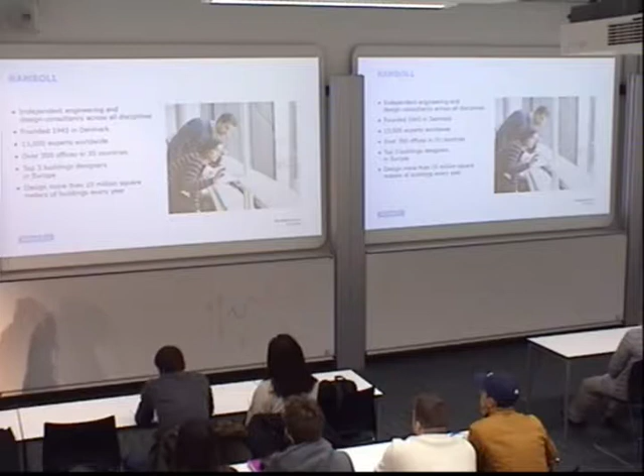So just a little bit about Ramboll for those of you that don't know us. We're about 13,000 employees in total, founded in Denmark in 1945, and at the moment we employ about 1,000 people in the UK. In the structures teams, we're probably about 250 in the UK, and we're a multidisciplinary consultancy, so we do structures, we do services, we do acoustics, we do lots of different things. We design more than 10 million metres squared of buildings every year, so quite a lot. We have offices all around the world and in the UK.

I'm based in the Cambridge office, just up here. We do have an office in Bristol. Our head office is in London. Probably got about 400 people in London, but there's about 25 of us in Cambridge. And I lead the structural engineering team there. And I've been in the Cambridge office for about 10 years now. In that time, I've probably worked on about 45 different cross-laminated timber and timber buildings. So what I'm going to talk about today is just some of my experiences, advantages, issues that we've had when designing with it, and just things to watch out for.

So these are just some of the projects that I've worked on over the last 10 years. We looked at a car park in timber. That didn't get built, unsurprisingly, but we've looked at some schools, done some schools. We've done an education facility for the University of Cambridge. We've done some residential properties. We've done some other teaching blocks, so lots of different things. And historically, timber has come from an educational background, so lots of schools and that kind of stuff. That's where it really started about 10 years ago. And around the last 3 to 4 years, it's moved quite heavily into the residential sector because people are seeing advantages of building with it in the residential sector.

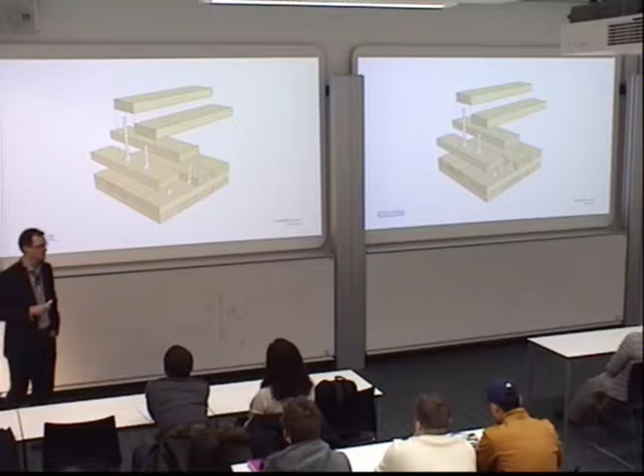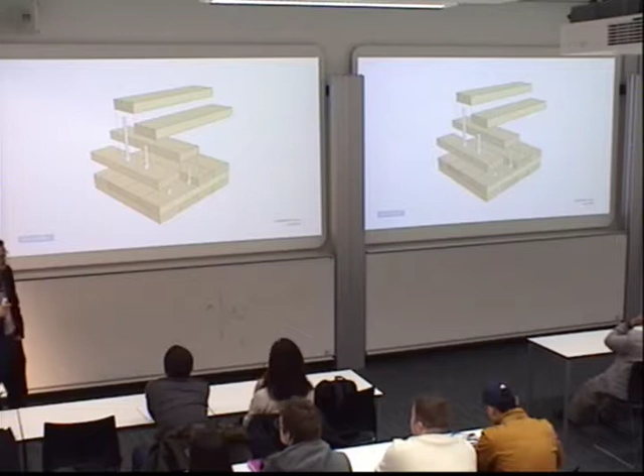So who knows what cross-laminated timber is? Who's ever seen a piece of cross-laminated timber? Anyone? Few half hands going up. Okay, that's fine. I'll explain a bit more about it. It's just interesting to understand what it is. And who's thought about designing with it before? Or who is doing their projects with it or thinking about it? A few people? No, that's good. So I would encourage you all to be looking at it because I think it's got a lot of advantages when used in the right situation. I think there are some situations where you can force it in there and it doesn't really work, but most of the time it can work.

So cross-laminated timber is layers of softwood laid on top of each other orthogonally with glue in between and put in a big press and pressed together. So they make big panels. They come in panels around 13.5 metres long by about 2.95 metres wide. They can manufacture up to about 18 metres long, but to transport to the UK, you can only have about 13.5 metres long. 2.95 is the maximum width transported to the UK. You can have up to about 3.5 metres, but the more standard width is about 2.4 metres.

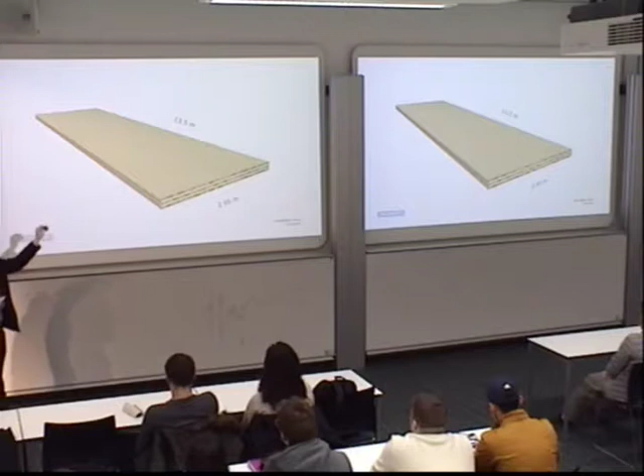And this is quite important in terms of the sizes, because the cross-lamination means that within a panel itself, it's two-way spanning, but when you start to put the panels together, you're really only one-way spanning, because you can't have a moment connection between the panels. Well, you can, but it's very hard and very expensive, and you shouldn't really do it, to be honest, unless you really, really have to. I think we've only ever done it once on all those projects. So it's something that really we should try and avoid.

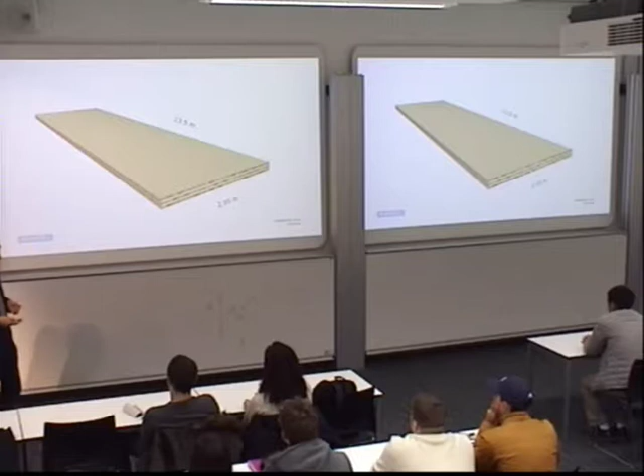So it comes in thicknesses between about 50 millimetres and 300 millimetres thick. So interesting for you who are doing your scheming, design and your projects. Walls will normally be between about 100 mil thick up to about 140 mil thick, and floors will be anything between about 140 to about 200, 220 thick, something like that. If you're starting to look at your floors and they're coming out about 300 thick, you've got the wrong solution, in my opinion.

This should only be used in a very occasional situation in terms of the 300mm thick for a floor, because whilst timber is good, we need to think about how much we're actually using of the timber, and we're not using this efficiently. We're only really using the bit at the top and the bit at the bottom, and the rest in the middle is just a spacer. So it's not an efficient use of the timber.

So where does this timber come from? Well, it comes mainly from Europe. We don't have any manufacturers in the UK who produce the CLT. About 90% of it comes from Europe, so from Austria and Germany, and the rest, well, we don't really get it from here, but it supplies the market in the US and down in Australasia.

So three main manufacturers, suppliers to the UK, are KLH, Binderholz and Stora Enso. They're the three main ones who supply CLT to the UK, and they do it through the subcontractors they have. So KLH do it through KLH UK, Binderholz do it through B&K Structures, and Stora Enso do it through a company called Eurban or G-Frame. So there's different ways to get it to the UK.

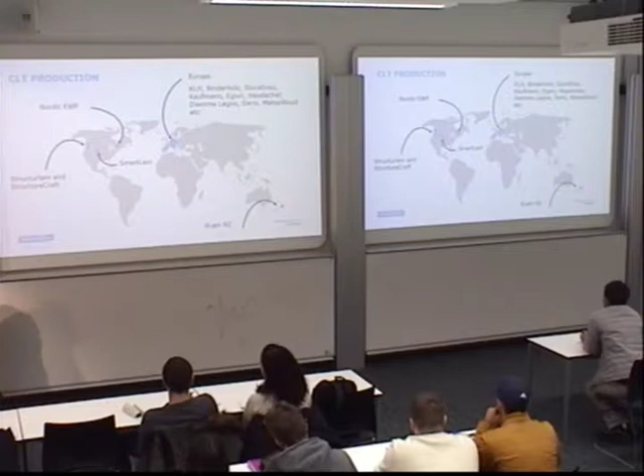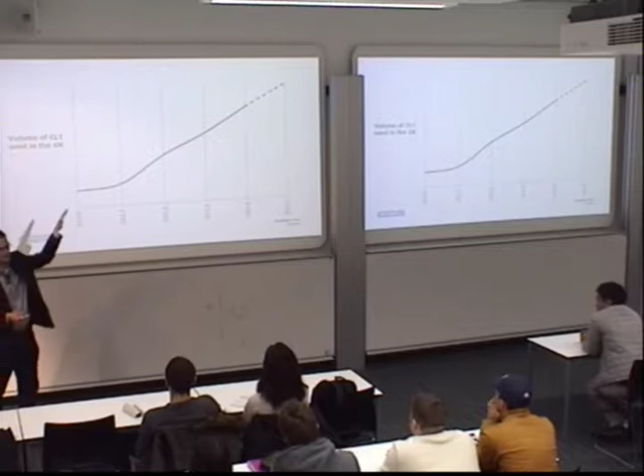So what you might be interested in, when you go into consulting engineering or whatever it is, if you're looking at the structural side, is applying it within your work. Well, one of the things that I've certainly seen, since 2010, is the volume of CLT used in the UK has gone up dramatically. I haven't quite got the numbers for 2015 yet, but I've seen some indications, and it's carrying on for 2016 as well on that trend. So lots of people are using it, and the volume of CLT used in the UK is going up.

Equally, people are getting more interested in it. They've mentioned it in the press. I'm sure if you have been looking at it, you'll have Googled it, and there's loads and loads of articles about it in the press. And that's been increasing as well over the last few years in terms of use, in terms of people being interested in it and wanting to learn more about it, which I think is great. It means that we can start to use more of it and start to use it in the right kind of ways.

So over the last sort of 10 years in the UK, about 1 million metres squared of internal area of buildings has been completed, which is massive. I mean, a typical secondary school might be about 10,000 metres squared. So lots and lots of buildings have been completed in it. So if people try and say it's new, it hasn't been used before, it has been used quite a lot in the UK. So it's not as new as quite a lot of people think.

So the question is, when you've been looking at it or thinking about it, is there anything that's stopping you from using it? I mean, it may be that you haven't really looked at it, but has anyone got any thoughts about why people wouldn't use it? Anything?

No? Okay, well, I'll carry on.

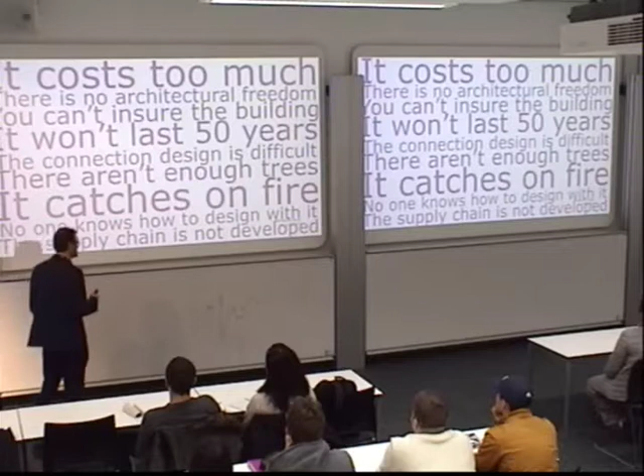These are some of the reasons why we found that people don't use it, why architects, clients, developers don't like to use it. So cost, that's a big one. Then there's things like there's not enough trees, it catches on fire, there's not enough supply chain, people don't know how to design with it. Well, hopefully that will change if more people like Wen-Shao teach people how to design with timber.

I mean, one of my bugbears is that we don't really teach timber in engineering degrees. There's a lot of concrete, there's a lot of steel, but not enough timber. So hopefully, coming here, you'll actually get some timber knowledge, whereas most universities don't. So I think hopefully we can get around that one. But there's lots of different things there that stop people from using it.

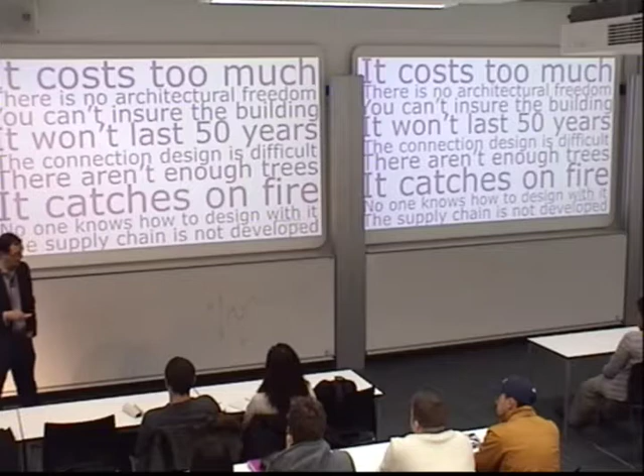So I think what I'll go on to now is just some of the advantages that I've seen and Ramboll have seen as to why you should consider it on projects. So this one here, CLT is very fast to erect. It's very quick to put up. So typically a CLT building might go up about 15% quicker than an equivalent steel or concrete frame.

So that 15% means that you can be on site for 15% less time, and you don't have to pay your site staff and everything else, and you don't have the contractors' overheads and prelims, so all their welfare and all their site cabins and setup. You don't have to pay for that for those 15% of the time. So it means you're starting to bring the cost down because of that.

Also, we did a 10,000 metre squared school. The CLT alone went up in 16 weeks. To do equivalent steel or concrete frame would have taken about 32 weeks, so twice as long to do the frame. Obviously, once you've taken into account the rest of the programme, it comes back down to the 15% I mentioned earlier. But it's about 50% quicker just for the frame erection, which can be quite important.

So when I talked about costs earlier, the costs are quite key to this. So a concrete frame might be about £200 a square metre to build. A CLT frame will be around £250 a square metre. So it's already 25% more expensive, which is going to be a struggle for any client to pay that extra money. Well, you've then got to look at, that's just a pure frame cost. When you start thinking about the saving on the programme, then you can really make that saving and really bring it down.

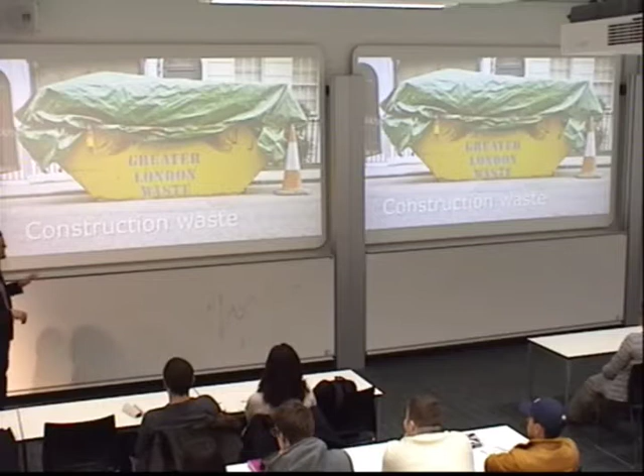Equally, there were only 2 cranes and 8 people on site during the whole superstructure erection. So that meant that health and safety wise, there were less people on site, less risk of accidents. So from a designer's perspective, that's good because we're already trying to reduce the amount of people and the risk of accidents on site.

Air tightness: the CLT, because it's cross-laminated and glued together, the air tightness of the panel itself is very good. It doesn't really let air pass through it. When you join them together as well, you half-lap them, you screw them together, and you create a very good air tightness seal there. So what you actually find is that CLT buildings are actually very airtight.

So instead of having an air leakage rate of, well, the building regs say we need to be down at 5 metres cubed per metre squared per hour, typically a CLT building might be down at 2.5, 3. So that air leakage rate means that you don't need to put as much heat into the building, so your M&E kit can be smaller, and therefore you make savings on that. So there's lots of added advantages to it that aren't immediately obvious from just looking at the CLT.

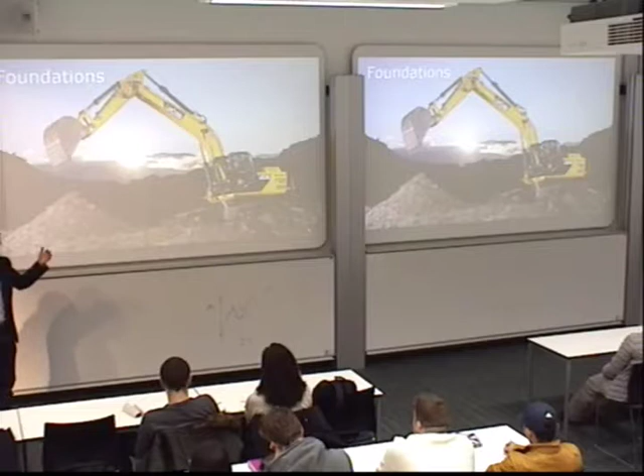The CLT, if you look at it pure mass by mass against concrete, CLT might be 500 kilograms per metre cubed. Concrete will be 2,500 kilograms per metre cubed. So there's a big difference in weight. When you look at it in terms of how much structure you need to put in, how much building weight you need to have in there, and all the people, a CLT building will be about 30% lighter than an equivalent steel or concrete frame. That's when you take into account all the floor finishes, all the desks, all the people and everything in a building. So that's quite a big saving.

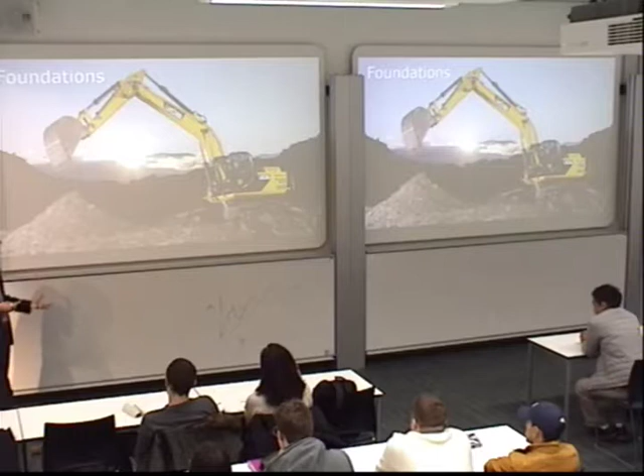So that means that if you've got underground infrastructure such as tunnels, sewers, or weight restrictions on the building, that can make a big difference. That means you can go taller, you can do bigger, you can do different things. Equally, if you don't have a restriction and you're just going into the ground, you might even be able to make a 5-10% saving in the ground in terms of cost, in terms of program. Again, that adds to the benefit of building in CLT.

And because your CLT forms your walls, your external walls, you can actually avoid a lot of secondary steelwork. So you're just fixing your cladding straight to your timber. So you don't need to think about putting in extra bits of steelwork just to support the cladding.

So a very little bit on the engineering, because I'm not going to teach you about how to design with CLT. Leave that to Wen-Shao. I'm just going to talk a little bit about the very basic principles, which I come back to day after day in terms of engineering. So it's really important with something like timber to understand what the material properties are, and going back to first principles. So for me, thinking about timber as a bunch of straws is a very good way to think about it, because you can squash them quite readily in one direction, across the grain. But if you try and push on the end of a bunch of straws, it's actually very hard to squash them, and that's really important.

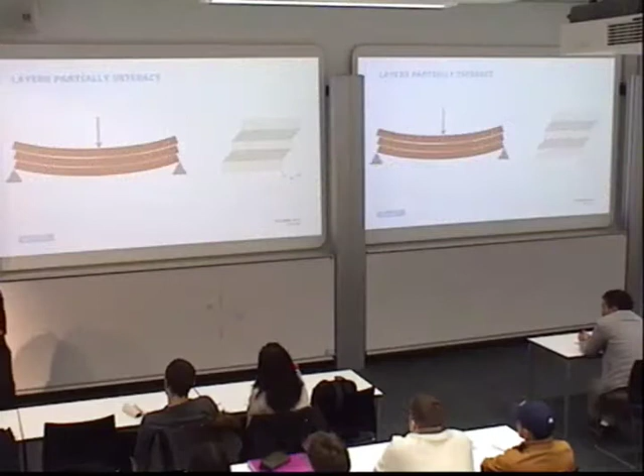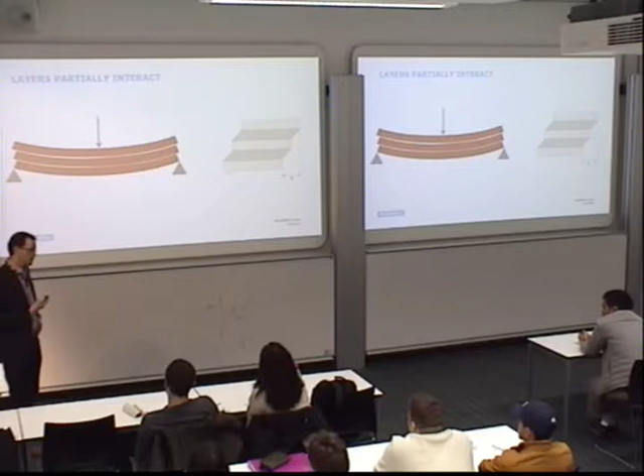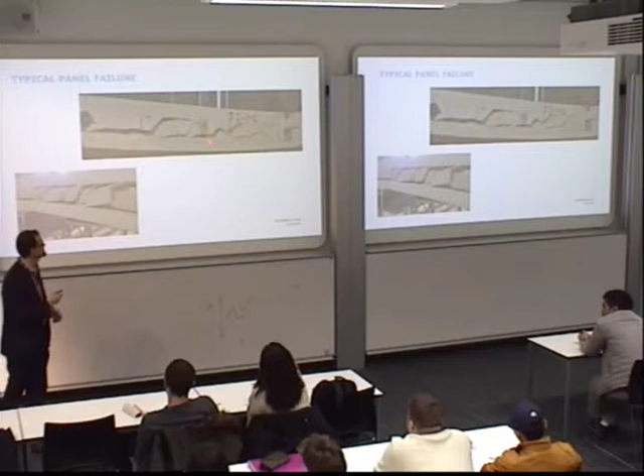So a little bit about the engineering. By cross-laminating it, we're trying to stop these layers from sliding over each other. But what you do get is you've got all your straws in there, so what you end up with is rolling shear. All those straws roll over each other. And this is just one of the failure mechanisms we're trying to avoid, a rolling shear failure, which is actually one of the most common ones in CLT. So you've got your top and your bottom chord, which are doing the work, as it were, and this is the spacer layer, but then it's also rolling over each other, and you get a rolling shear failure.

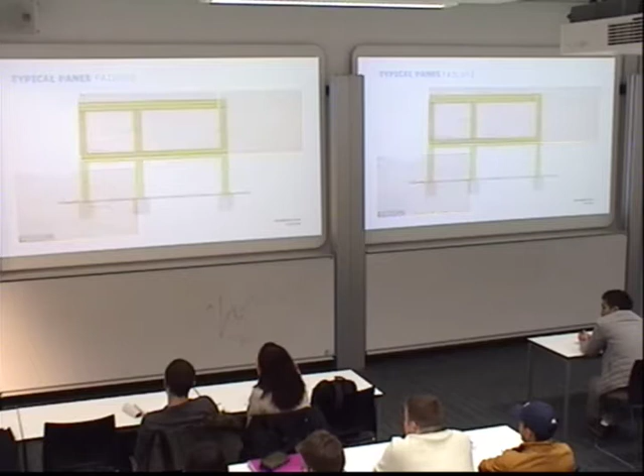This might even be one of your pictures, to be honest. I'm not sure.

So obviously what we're trying to do is take all our gravity loads and put them down through the floors, to the columns and down into the foundations. Very, very simple stuff. When we start to go tall as well, we need to start thinking about how we can make the building stiff enough so that it doesn't move too much in the wind.

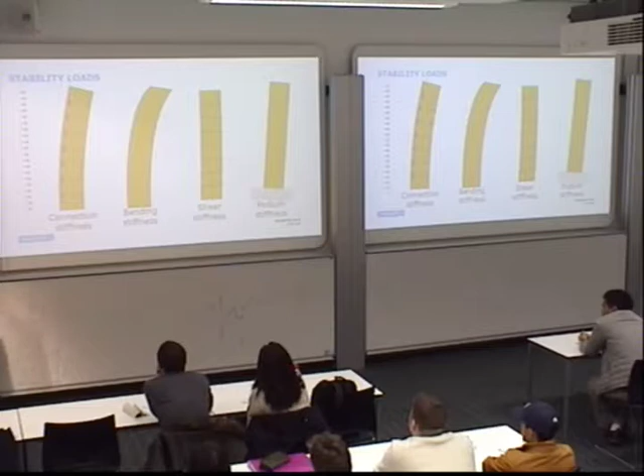They hadn't got the fire compartmentation in there at the time, and it's one of the risks of building with timber, especially during construction, is any kind of electrical fault or anything that causes a fire. And if it's not protected properly, or there's not the right kind of fire alarms, you can have this kind of thing happen. One of the positives that came out of this: it burnt down on a weekend, so no one was in there, which was definitely a positive.

But it was designed for a 2-hour fire rating. It stood up for 6 hours before it fell down. So immediately, you could say we're possibly over-designing then, because this was one of our projects, because it lasted for 6 hours and it was only meant to last for 2. But it shows that the codes are inherently conservative.

With what we do, when you're a consulting engineer, there's a tendency to design things to 80% capacity or something. To be honest, you could design everything to 100% capacity and it will still be fine. Probably design it to about 120 and it wouldn't be a problem at all. So it's just interesting to understand the fire nature of it.

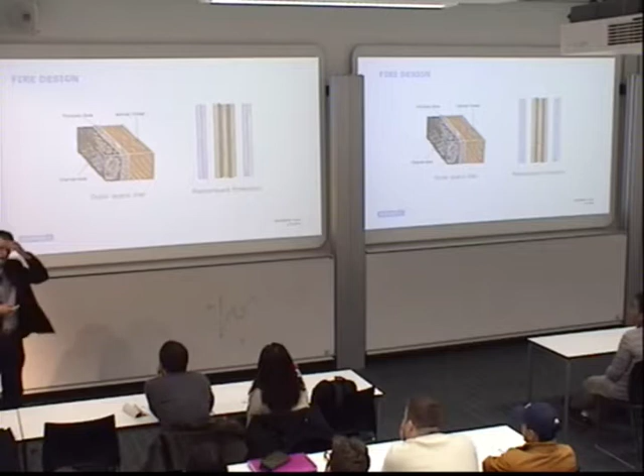There are different ways of doing the fire design. One of them is to leave it exposed and have a charring layer. Timber chars at about 0.7 millimeters a minute, typically. So after a certain amount of fire, we know we've got some timber left there that can take the load. As long as that timber is man enough to take the load, it's fine, it can work. Or we can cover it with some plasterboard. That gives us a bit of fire protection, and then the rest of it is taken in the timber and charring again.

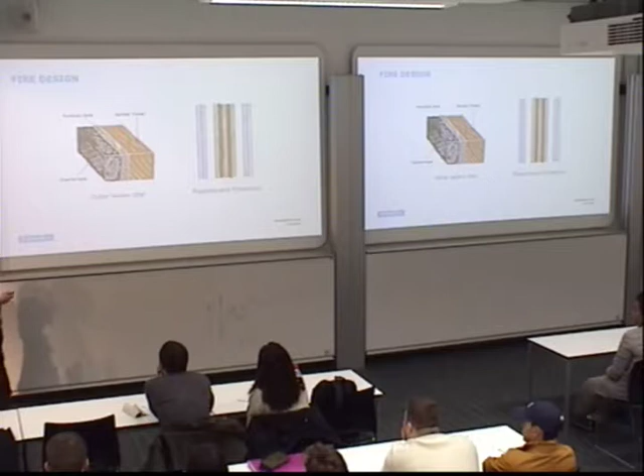And after an hour, we took the coals off, and we just wanted to see what happened. Did it carry on burning? Did it carry on charring? Did it smoulder? What happened? Well, it carried on smouldering for about an hour, and then it kind of just stopped. And that was it. It didn't suddenly keep on burning, didn't suddenly disintegrate. You'd probably only use it about 5 or 6 times, and then it would probably disintegrate.

But for us, as engineers, it was quite nice as a very non-technical experiment on how timber performs under fire. And it reassured us that what we were looking at in terms of the code and how we were designing with it was kind of right. We kind of understood it a bit better because of this.

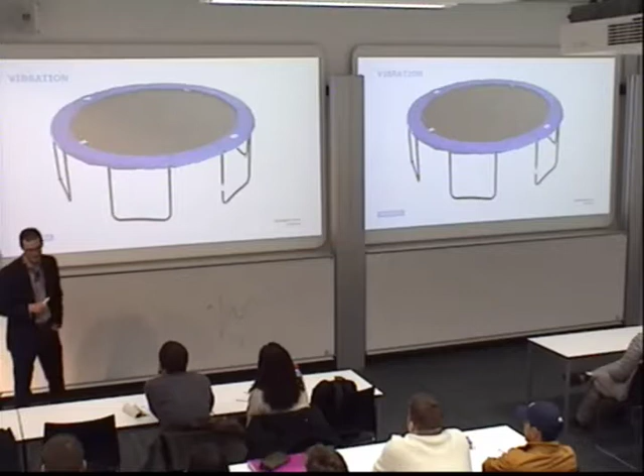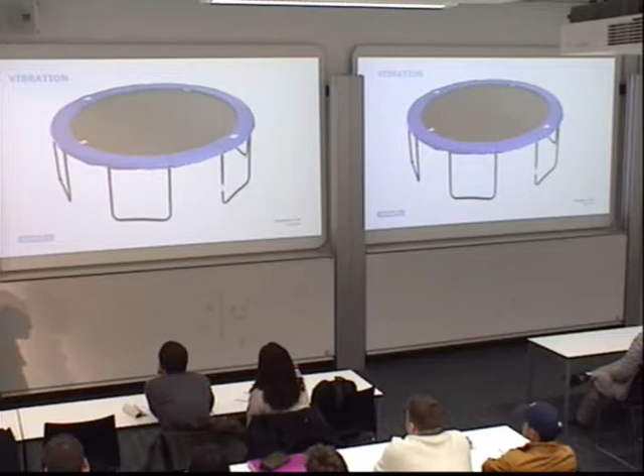Vibration, I know I've been talking to Wen-Shao about this earlier. When the codes at the moment say design it for 8 Hertz natural frequency for a residential floor, that's not entirely the best way to look at it, and then there's no real guidance for schools, so we go down to about 6 Hertz, but it's a rule of thumb that we worked with over a number of years. But vibration is quite important. It is lighter weight than concrete and steel, therefore you do need to think about it more in terms of the vibration criteria.

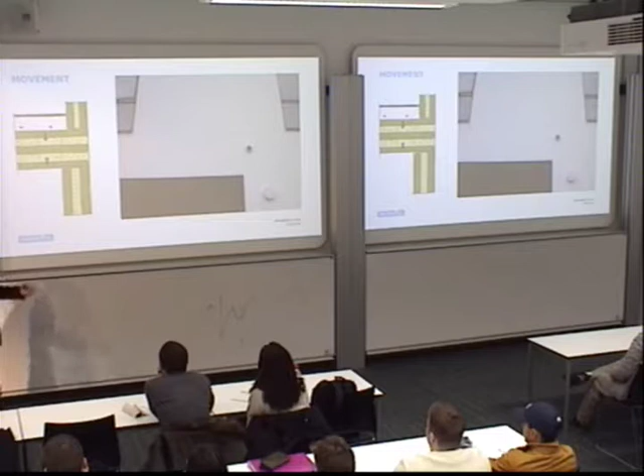You're also going to get drying shrinkage as the timber dries out. And what happened on this project is, this is a rendered facade, and basically the floor is squashed down and popped the render out. So it's broken the render and it's popped out, and that's the line you can see along here. So movement is really important to understand in timber. You've got to think about it early and think about how you mitigate it.

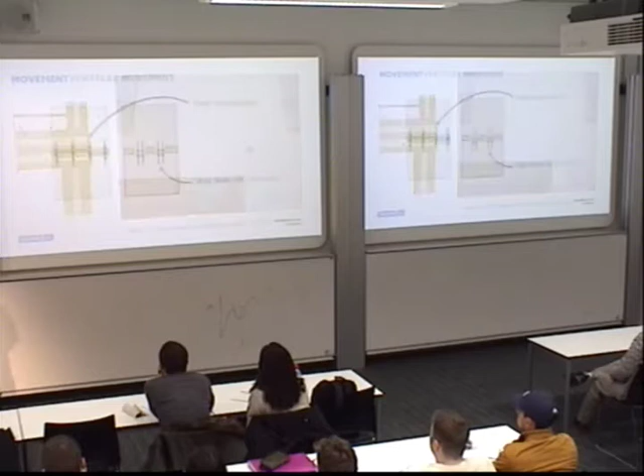On this one, the simple thing to do would be put a movement joint in the render. It's very simple to do, but it wasn't done, and therefore it cost a load of money for the contractor to come back in and fix it. So movement is very important. You can try and avoid this by doing things like this, where you take the end grain straight down and you put it onto the end grain of the wall below.

So this is the floor coming through here, here, and here. So you can do that, and you try and put the end grain to the end grain, so you're not squashing any straws. You're only going on the end of the straws. This creates problems in as much as then you have a lot of wastage of your timber, because you're cutting out this section of the wall there, there, and there, and you're cutting out this section of the floor here and here.

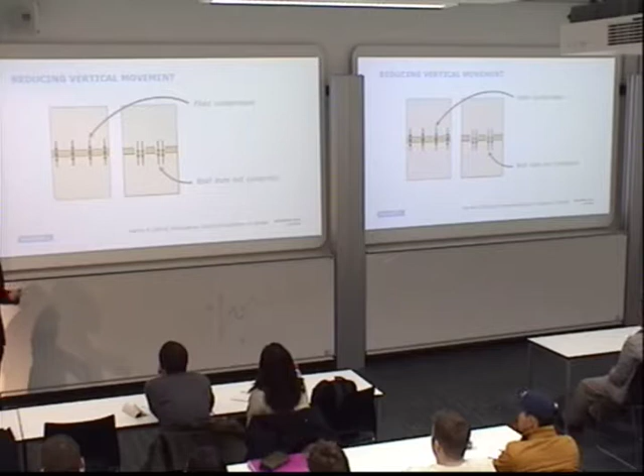And when people build with timber, you pay a lot for the timber itself, for the volume of timber, and you pay for it as a big 18 meter long by 2.95 meter wide panel, and anything they cut out from it, you still pay for that. So you want to try and avoid these kind of things.

So we've been working on a 10-story building, and what we've actually done on this one, we've cut out little sections of the floor, and we put a grout pocket in there. So we put a pocket of high strength grout to try and stop our crushing and stop the movement of the timber frame. Because we worked out that if we didn't do anything, we'd end up with 60 odd mil of movement at the top of the building over the lifetime of the building, because it would settle down, it would shrink down, and it would crush under the weight of it.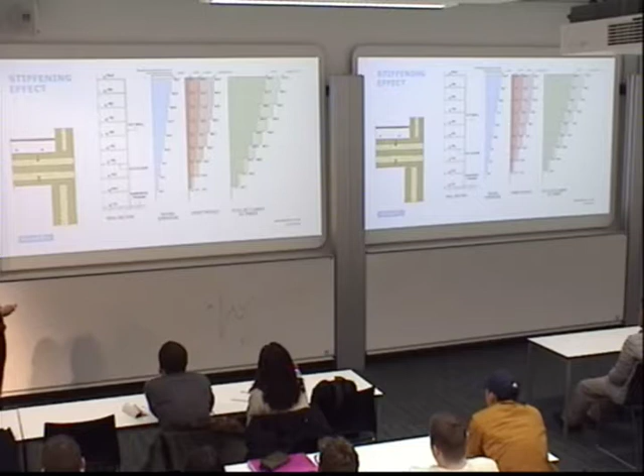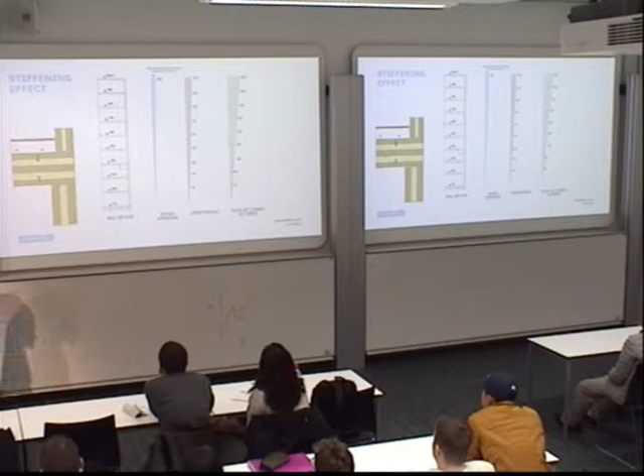So obviously that's not good for a number of reasons, for your lifts, for your thresholds, for your finishes, for your cladding and everything else. So we knew that wasn't going to be acceptable to the client, so we looked at various options of stiffening the floor. We came up with, in conjunction with a subcontractor, the grout pocket, and we got the deflections down to about 10 mil, which is not too dissimilar to a concrete frame or steel frame, which will have some axial shortening in it anyway. So the client was very happy with that. He was used to concrete frame, so he was pretty happy with that.

So a little bit about scheming, which may well be helpful to you. If you can, try and keep that and avoid this. This means you'll have transfers, you'll have a thicker floor slab, it'll cost more. You can try and line up your load-bearing elements, you'll have a much more efficient structure, and therefore you're much more likely to make the CLT work, or to be honest, have a more efficient structure, whatever your structural form. It's a more complicated design as well. If you're short on time, which we often are as engineers, trying to make the design as simple as possible is better for us, while still having the architectural freedom to do something different.

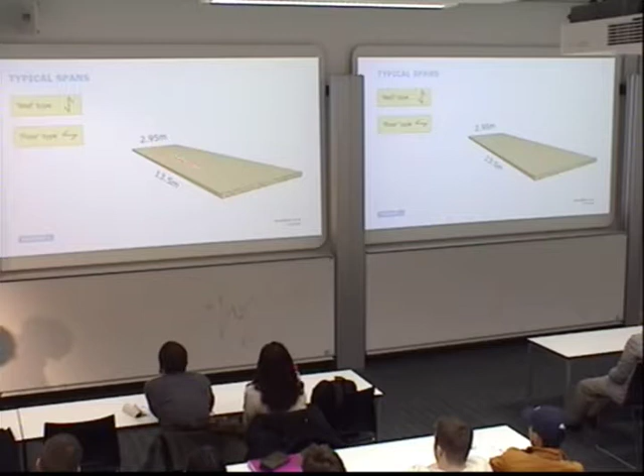So you've got different types of panels. You've got ones where the outer grain is going vertically, so through here, or you've got the floor ones where it's going horizontally. So this is the floor here. Whereas if the outer grain, if those lines were going in this direction here, that's what we call a wall panel. So it's just different ways of the outer grain and the orientation depending on what you want to do with it.

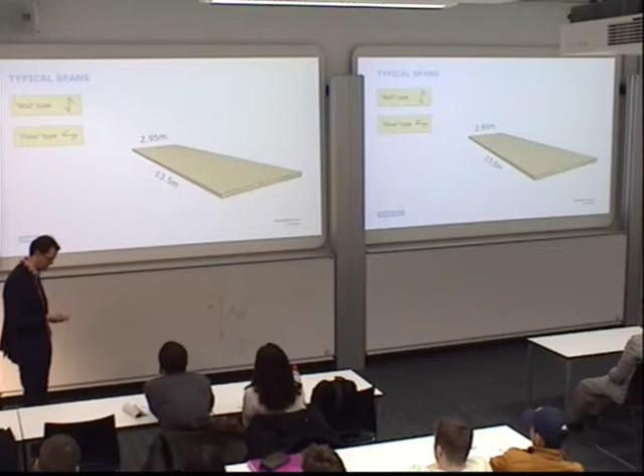So typically offices can span up to about 7 meters, residential up to about 5 meters. So they're just rules of thumb, but they're fairly standard. You can go more, you just might end up with a thicker floor and something that's not necessarily as economical.

Because it's a lightweight material, if you can try and keep your finishes lightweight as well, that helps because it just means it's a lighter building and you make efficiencies with it. So if you can have things like timber boards, stud partitions, timber boards for your floor, cladding, something lightweight, zinc, panelization, panels, that kind of thing, and try and avoid bricks, thick screed, block partitions, that kind of thing. Just makes it easier.

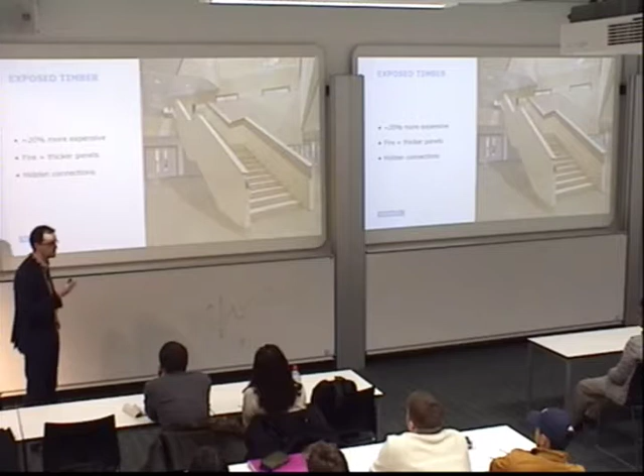You can have exposed timber and it can look very nice. This is a staircase that is actually made out of one panel, and even the balustrade is recessed into it. So it does cost more to have it exposed because they have to do more finishes to it to make it a nice finish so you can walk past it and you can touch it.

Also, just coming back to the fire, if you have it exposed, you have to put more timber in there because you have to account for the fire case. So you have to put more timber to make it thicker so that when it burns away, you've still got enough timber left. And connections can be a bit more tricky because they have to be hidden away. You don't want to see lots of bolts. Well, you might want to, but typically you don't want to see lots of bolts, screws, angle brackets, that kind of thing.

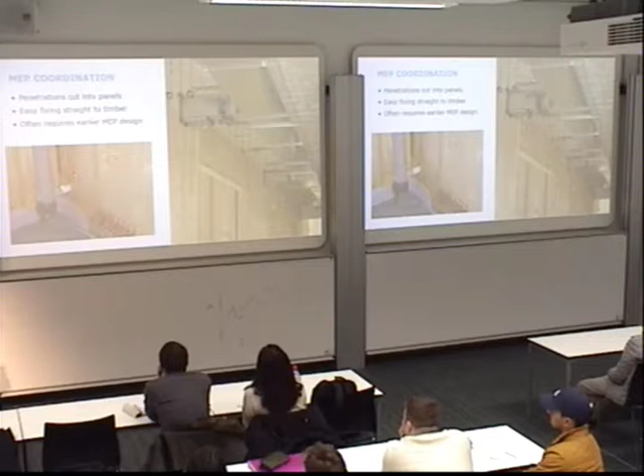And one of the things to try and do is try and get your coordination with your mechanical and electrical services done early. Try and do that so you can pre-cut all your holes in the factory for all the services. You can even prefabricate a lot of your services and put those in as well. So there's a lot of coordination things that can be done nice and early and try and avoid things like this, which is an afterthought of a hole in the timber.

So just a little bit about the details. You know, as consulting engineers, most of the time, most other companies will design maybe a scheme design in timber and then it will go to a subcontractor. About 10 years ago when we started looking at this, we took the decision that we're consulting engineers, we should be able to design in steel, in concrete and in timber. There's no reason why we shouldn't. You know, it's a material, we just have to learn how to do it. So we decided that we would do the design for that.

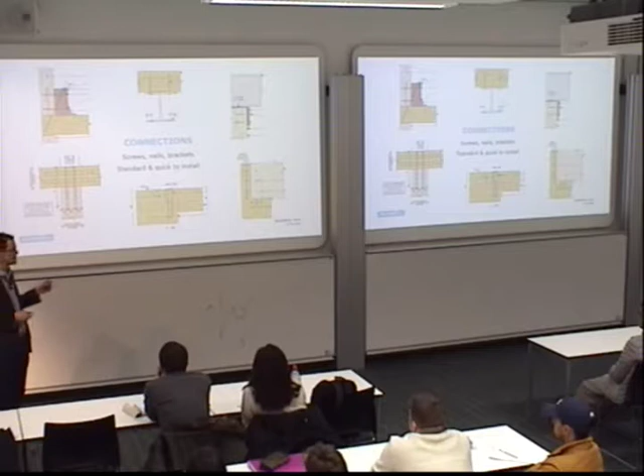What you'll find is when you do a lot of timber design, connections do govern quite a lot of the member sizes. Certainly with beams and things, you can design a nice glulam beam, but you can't get the forces out at the end of it, and you have to start making the glulam bigger. So at first we didn't do the connection design, and then we went, hold on a minute, we need to be able to do the connection design as well. So now we do the connection design and the timber design, which most consulting engineers won't do. But I think for me, I didn't really see the point in being a consulting engineer if I couldn't design with most materials.

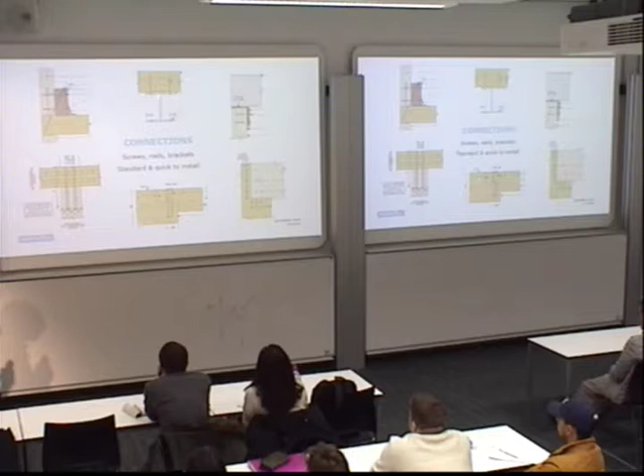So these are just different connections. This is a parapet here with a floor here and a block. Sometimes we put steel in there. You can put steel together with timber very well. You'll see here these interesting little holes, so you can actually put the drill through and screw that in. Because you've got to think about buildability. How are they going to screw that in if you can't get your drill bit in there to screw it? So you've got to think about these kind of things. So it's quite an interesting way of thinking and a much more practical way of thinking than potentially just designing a steel beam or a concrete beam.

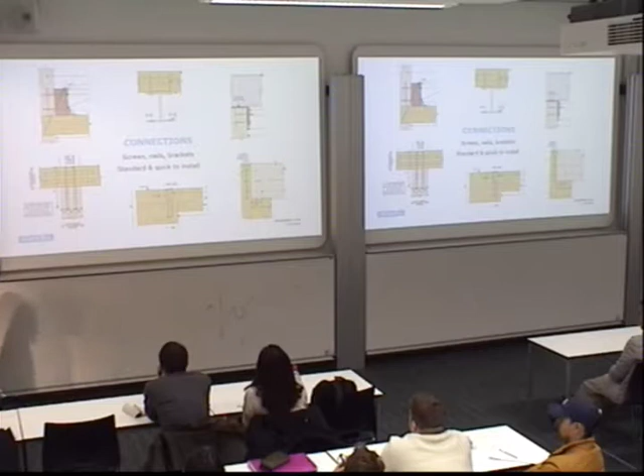When you start to go tall, you start to have to think about how you're going to transfer those forces between the panels. So if we think about when you start to try and push the building over, you're going to have overturning forces. So we developed this kind of detail, which is a bolt through the floor. So when our building starts to topple over, you can imagine you get uplift on one side and a crushing force on the other. And the wind can obviously blow from two directions, so you have to have uplift on this side and crushing on the other.

And these ones in the middle, they take the shear. So it's basically a third in uplift, a third in shear, and a third in downforce. So that's just typically how we look at it in terms of the engineering design.

And one of the things that really interested me and why I got into timber design in the first place is, what I've been discussing, we're not even sure that that's completely right. We think it's right, but we don't really know because there hasn't been enough research done into timber and how it reacts. So we're pretty confident, but I'm sure if we did this again, we did this design 2 years ago, even now we'd probably do it slightly differently.

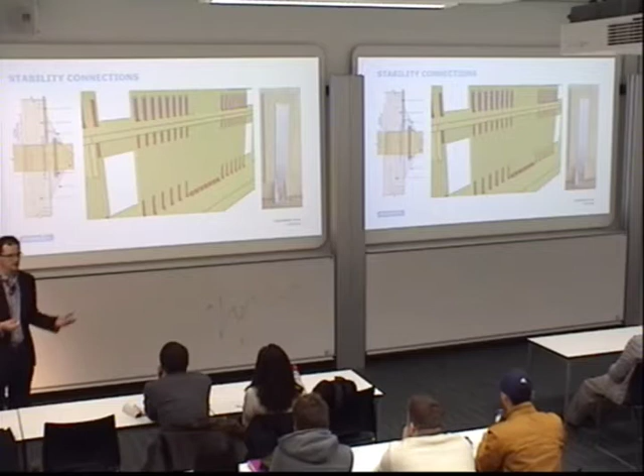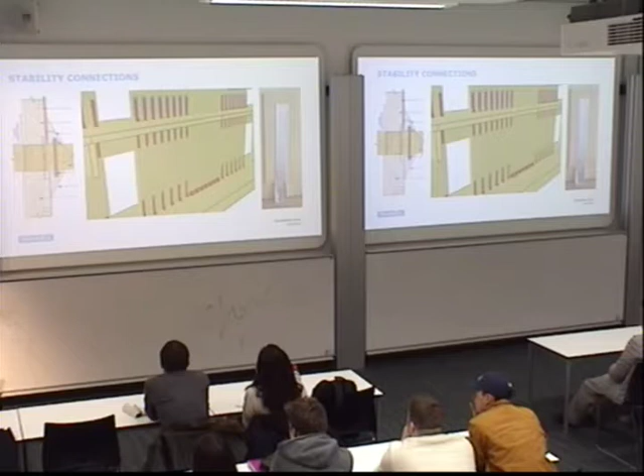We try and be more efficient. We're pretty conservative with the design at the moment, and we want to be more efficient, and then we'll make it cheaper, easier for people to build with it, and then we'll build more with it, and it'll be more sustainable, and it'll be really good. So that's what partly got me into the timber side of things, is that as a consulting engineer, I can still do bits of research. I can still push the industry forward and have a bit of fun with it as well.

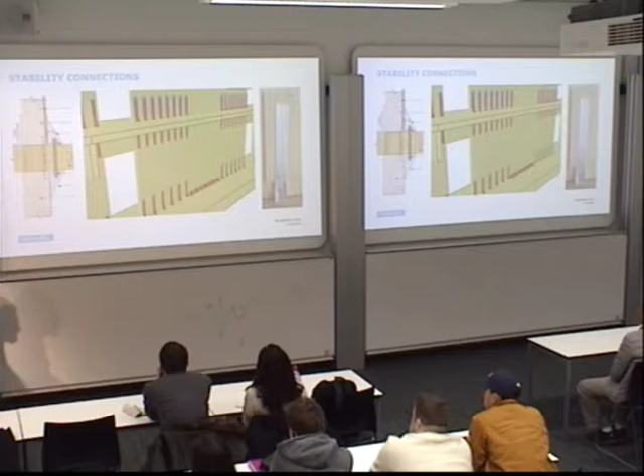So this is the detail we came up with on this one. You can recess it into the wall. It's a single shear bracket on this one, but you can play around with it and try and make it work more efficiently for the finishes. The reason this is recessed in is because we've got finishes on there, and we don't want to make the corridor narrower or the building wider just for a single angle bracket.

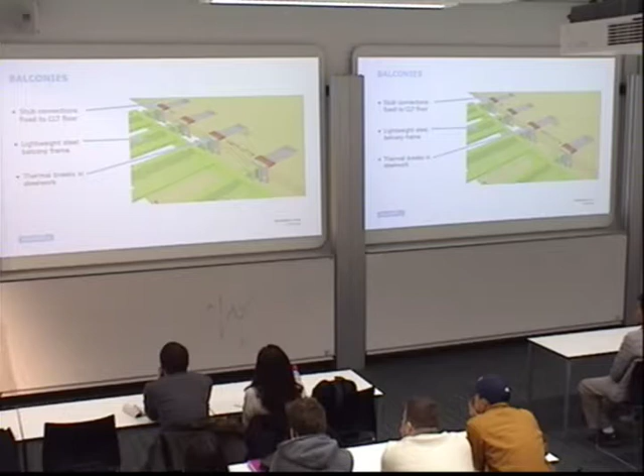We've also got balconies on our project. These are our steel bolt-on balconies. If you have inset balconies, so balconies that are recessed into the building, I think you could do those in CLT, but anything sticking out from the building, I think the weather protection of that is just too risky to have it in CLT. It's not meant to be something that's left exposed externally, certainly not with direct wetting. So I think the risk is too high. But these have got little steel brackets, and this little blue line here is a thermal break to take it through to the outside.

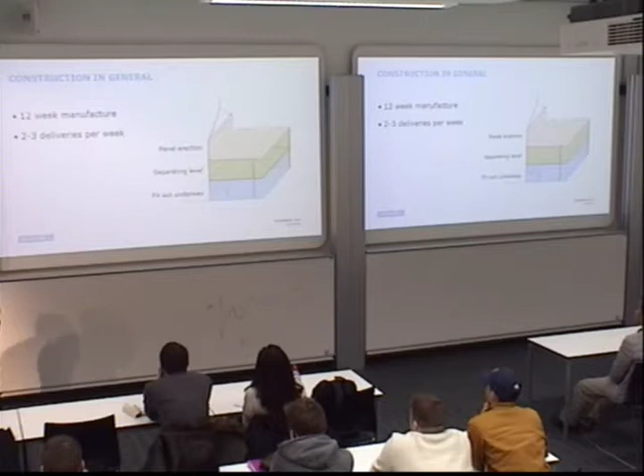So a little bit about construction. It's about a 12-week manufacture period, and then they have about 2 to 3 deliveries a week. And what you can generally do is start erecting on the ground floor, and then once you're 2 floors up, you can actually start fitting it out underneath that. So you can really start overlapping your program and making those program savings.

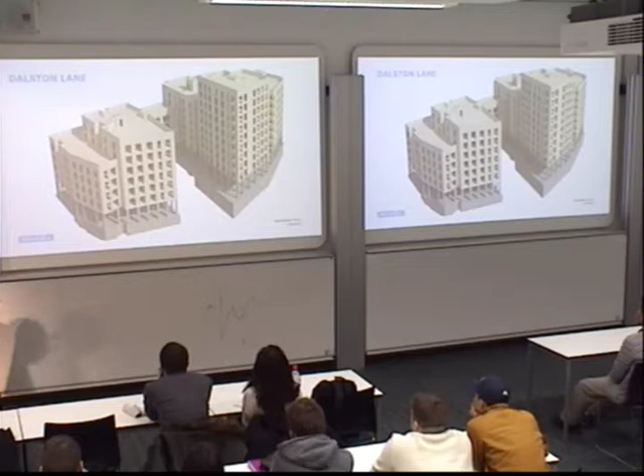So I've just got about 3 case studies to go through now. First one is Dalston Lane. So this is our 10-story. It's got 9 stories of CLT, 1 story of concrete. So that's a concrete podium down here, which has got retail space in it. So it's got a different structural grid. So it made sense to do it in something different. Concrete was a good option here. And it's got about a 400 to 500 thick concrete transfer slab, and then the timber goes straight off the top of that.

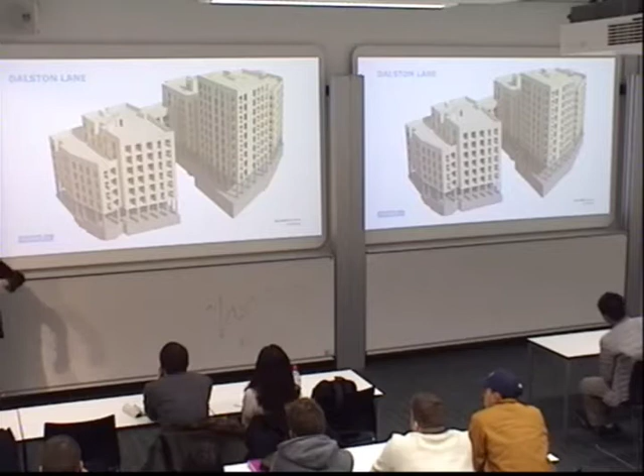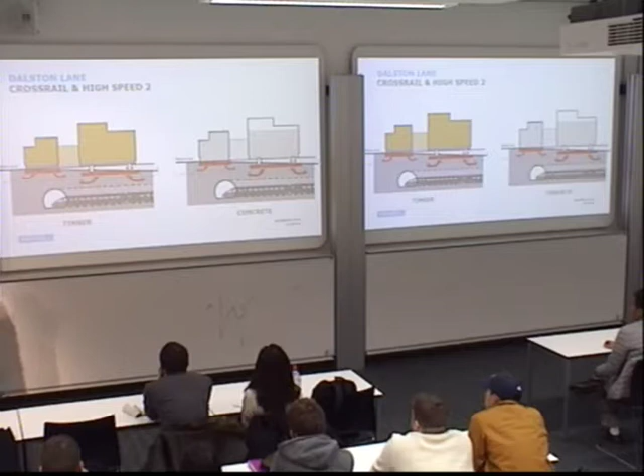So one of the main reasons why we chose CLT on this one was we've got Crossrail and the high speed rail link, one underneath the building and one right next to the building. So we had a weight restriction on the building. And when we looked at it in timber, we could do this big. When we looked at it in concrete, we could only do 15 fewer flats. So immediately the client, by doing it in timber, is able to get 15 extra flats. And we actually designed it so that in the future, he could put 20 extra flats on top of the building.

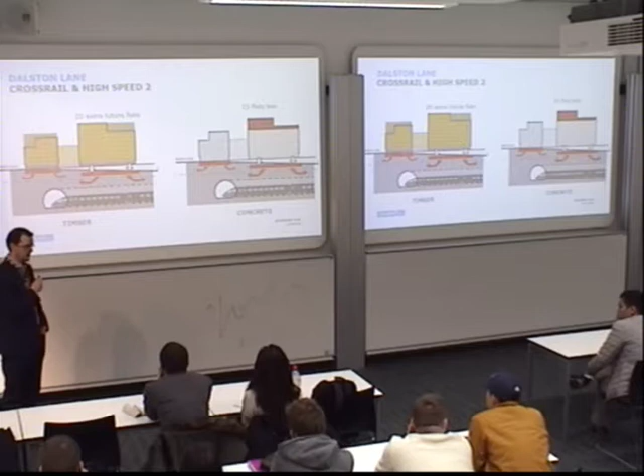So from his point of view, he's got 15 extra flats, which might be 7 million extra pounds in income. He can actually have an extra 20 if he got planning permission for them. So for him, it was a fairly obvious choice why he went for this. So this is to do with this 30% lighter kind of aspect.

So what we did on this one was we were working for the client at the start. So we were here in the design team. Then when it went out to tender, we actually got novated across to the CLT subcontractor. So we worked for the supplier at that point, which is fine.

We worked with this particular supplier quite a lot. So it was quite an interesting way of doing it, working for a subcontractor, but it was a good way. And we learned a lot from them, and I think they did from us as well.

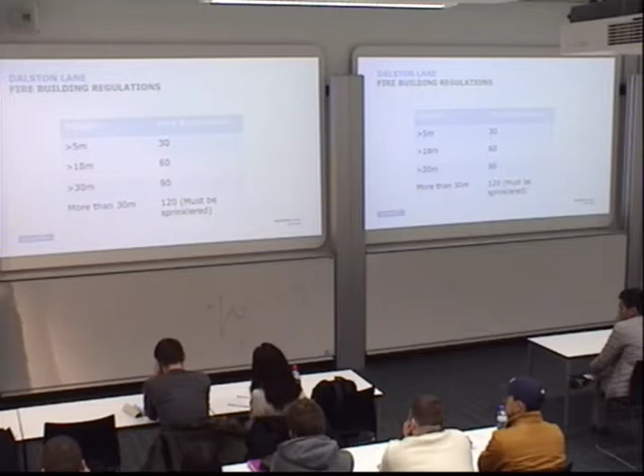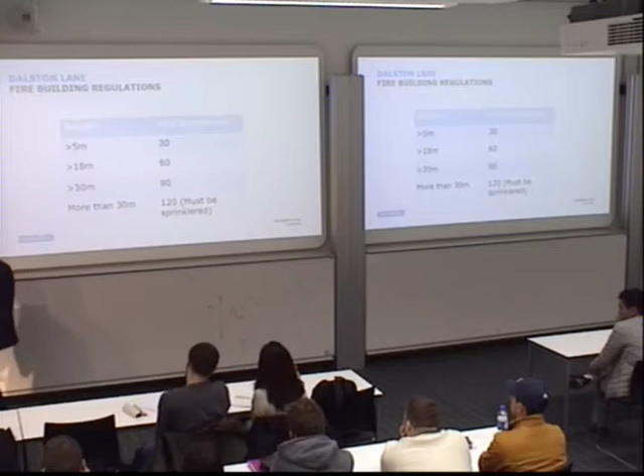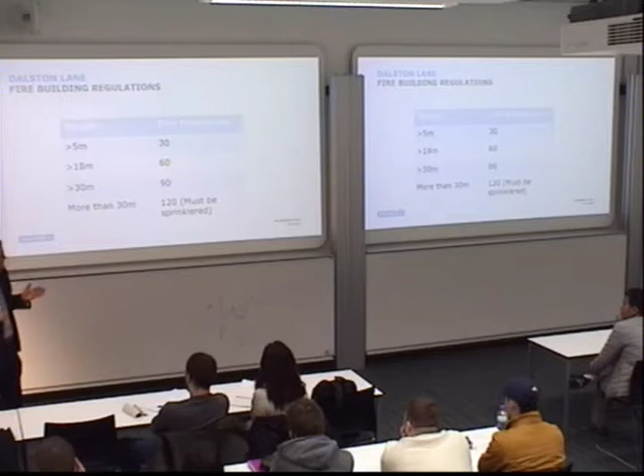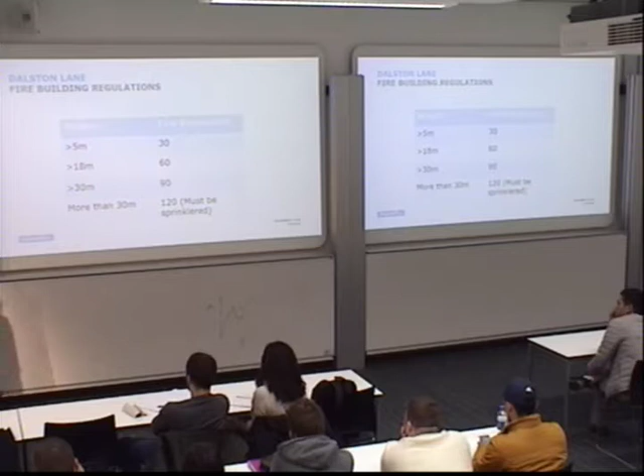So if you're having to take that extra time in the timber, you're having to make the timber very thick. So if you're above about 30 metres, timber starts to become challenging to make the economics work. On Dalston Lane, we're at 29.97 metres to the last habitable floor. So we're just inside the 90-minute range, which means we can be quite cost effective.

Because as soon as you go over that, the whole building has to be 120 minutes, not just the bit that's above it, but the whole building. So it can be quite a challenge. There was originally a roof terrace on the top, which meant that you could access it, and that was above the 30 metres, but we quickly got that changed, so there isn't one up there, so that we didn't have to design for it, because it would have added about 15% to the timber volume of the building.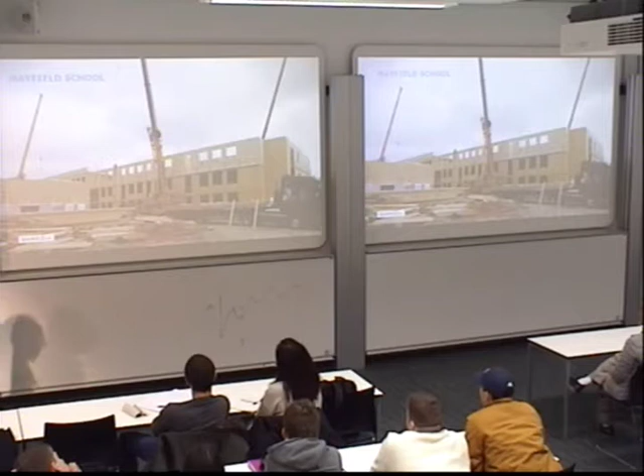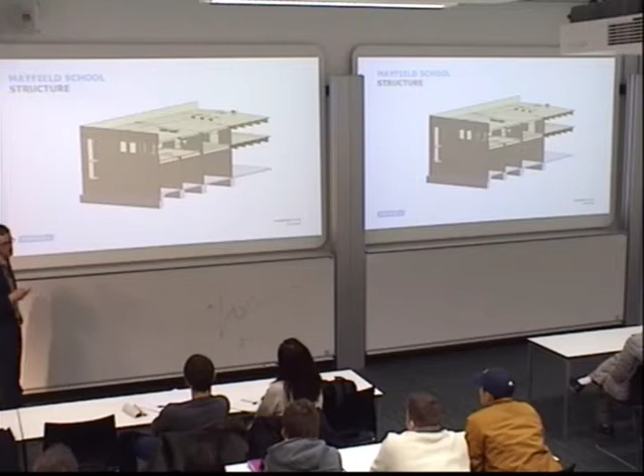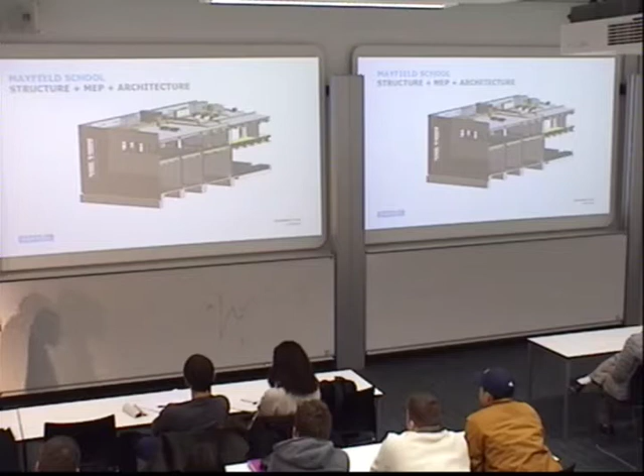Mayfield School is a school we completed a couple of years ago in London, all built out of CLT. The key thing on this one was the BIM process and the design process we went through. So we had our structural model, we had an MEP model done in 3D as well, and we had the architectural model in 3D. So over a period of months, we coordinated these and made sure that the CLT had all the holes in the right place.

Then what we did is we just gave our model to the CLT fabricator. He took that model and he started to look at the panelization, so where he's going to split the panels, and look at how he could fit them onto his mother panel. So this might be the 18 metre by 2.95 panel, and he looked at how he could split it and panelize it up. And for him, he's trying to minimise the wastage, because if he can minimise wastage, he can have a cheaper price and he can win the contract.

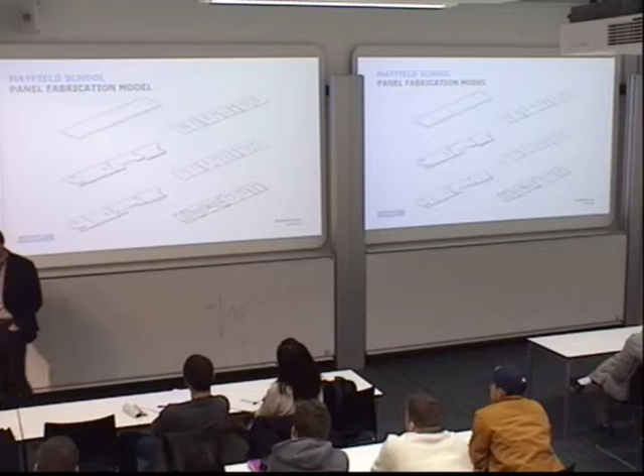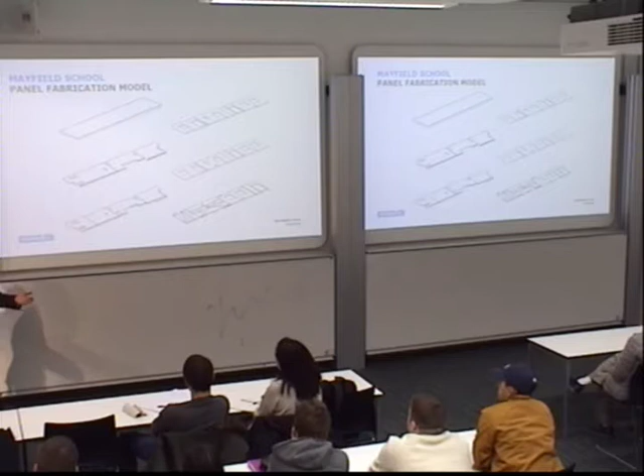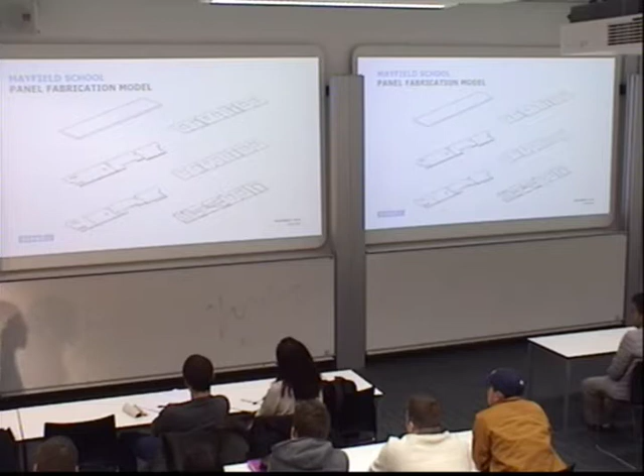But for us, it meant that he just gave his model back to us. And we took the model, we overlaid it with ours, we did a clash detection on it, and we spotted things that weren't going to work and things that were fine, and then we sent our comments back on the model. So it was all a very seamless process. When we get steel drawings or that kind of stuff, we have to check each one of them, and we check them by hand on paper. Whereas this, we were able to do it much more in 3D in a collaborative environment.

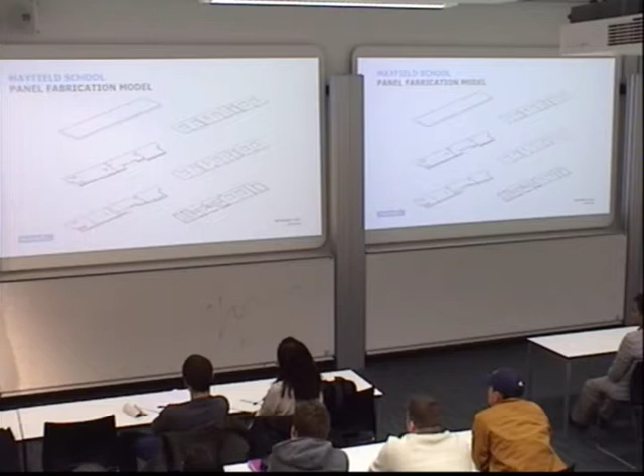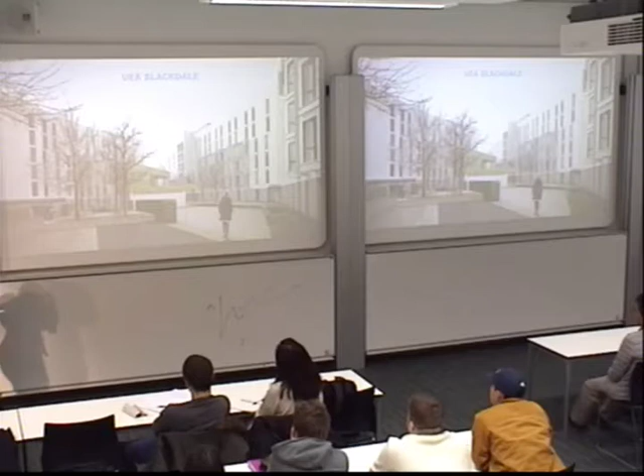And the last case study is University of East Anglia, Blackdale. So this is student residences. So this is 500 student rooms and a central block of ancillary laundry space and cafe area. So we started working on this in about September 2014. Within about 22 months, it was built and occupied, and people were in there living in it. So they only had 62 weeks on site to build the 500 student rooms.

I don't know how long your one here took, but probably several years. Probably a bit longer than that.

So it can be very quick, and this is it during construction. And you can see here they're building up here, they've already got the windows in here, and they'll be putting the first fix for the M&E services in. So they can really overlap that time, that program on there. And here you've got bathroom pods, which are lifted into place.

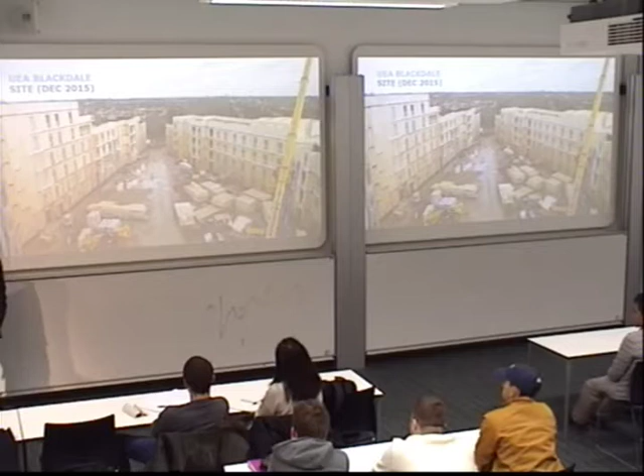So they're lifted in. They're not lifted into the exact location, they're lifted in on skids and then moved around once the rest of it is built, so they can get the building up, get it watertight and start fitting it out. And you can see here, there's quite a lot of lay down area for the panels, but that was just to make sure that they didn't get caught up with any delays with panels coming across from Europe and things. They needed to keep the program going as fast as possible.

So, a bit about research and development. One of the things I'm quite interested in is how tall we can go with timber, and how tall we can go with pure timber rather than having a concrete core or something to help us go tall. So Dalston Lane, that's to the top of the building, the 33.8. It's not the habitable floor. So it is currently the tallest pure CLT building in the world.

There are the Treet apartments in Norway, which is a glulam hybrid frame, which doesn't make sense in my mind. It's got some glulam bracing going straight through someone's dinner table and stuff. It's just very odd. And then there's actually one in Canada, a student residence project, which is 18 stories tall, which has a concrete core and timber floors. So people are going taller, but I'm just interested in how we can go a bit taller.

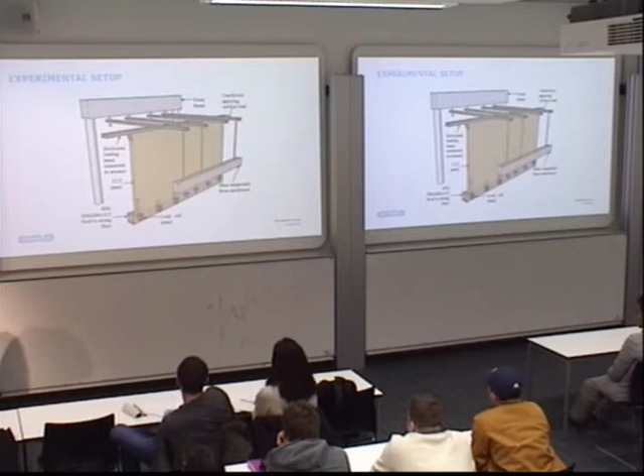We've been doing a bit of research, not with Wen-Shao on this one, but with Imperial and Rothoblaas, looking at connections. And it's coming back to that thing I was talking about earlier, the stability, and the one-third and the one-third. And we were trying to look at how these connections were reacting under forces. We had set up a little test rig, and you can see down here this angle bracket is all broken because we were testing it and seeing how the panels react when they're pushed over. Do they crush it? Do they twist over the single point at the end, or does it crush slightly, redistribute? How does that affect the connections?

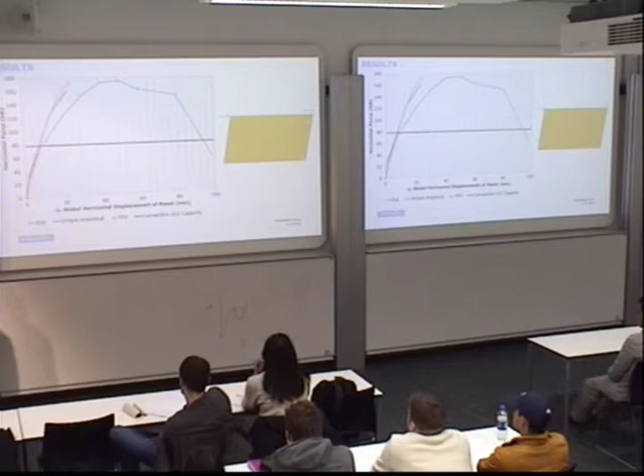And we actually found that the experimental analysis is in blue there, the finite element analysis is in green, and the simple analytical analysis is in red, and this is our ULS capacity. So actually, up to ULS capacity, they're pretty much similar. So it gave us the confidence that we were doing at least something right with our design, and it was about the right kind of way. If we'd been far off with that, we'd have been quite concerned.

Other things we're looking at the moment is some kind of peppered facade concept. So trying to use the idea of when people have gone tall with concrete and steel, how do they make their building stable? Well, one of the ways of doing it is to have an exoskeleton, to have kind of arms that come out and hold onto the edge of the building. So we were trying to think, how could we do that with timber?

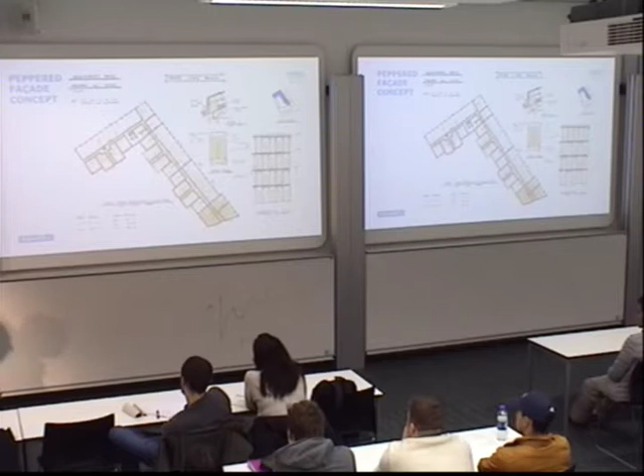So this is our exoskeleton idea, where we have diagonal areas where it's almost like cross bracing on the outside. It makes it very stiff, as opposed to just having your windows in a line and a structure in a line and not really any interaction between the two of them. But it's just something we're working on at the moment, to try and work through and see if we can make it work. It's a bit of fun.